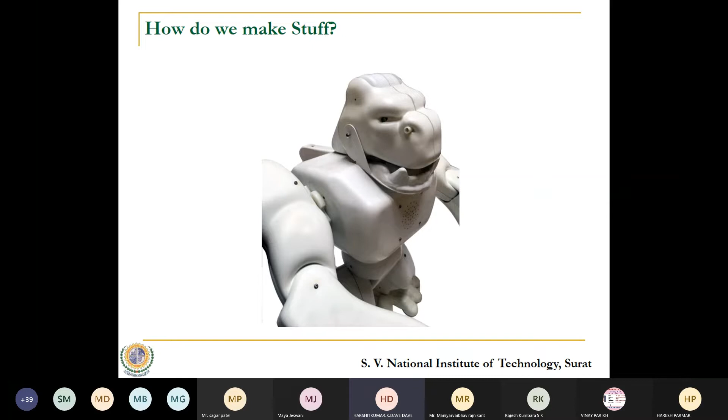Another way of making things is by using forming methods. There are different ways of doing this, but I wish to show this particular example where a vacuum forming process is used to make an interesting toy for kids.

Beyond that, another method widely used is the casting process. In casting, you have a liquid material that is poured into a mold, and a certain shape is obtained when it solidifies.

A very good example is the chocolate that we try to make at home. So that also is an analogy with the casting process.

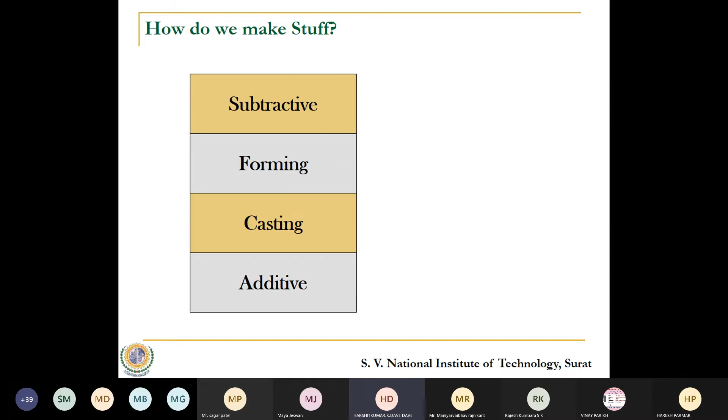But apart from these three, now additive manufacturing or 3D printing, in simple words, is another process which is coming to prominence since the last 10 to 15 years. You would be surprised, and maybe you would know, that it is capable of replacing all these three processes. You can create idols with the help of 3D printing. You can make toys the way we made through forming, and you can also print chocolates. So these things can be applicable to almost all the fields of our engineering applications too.

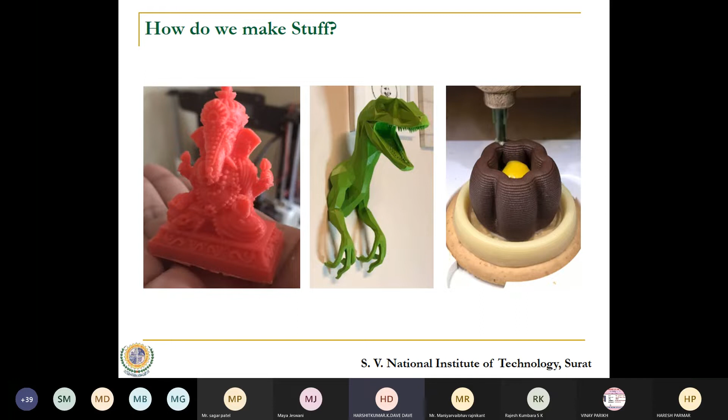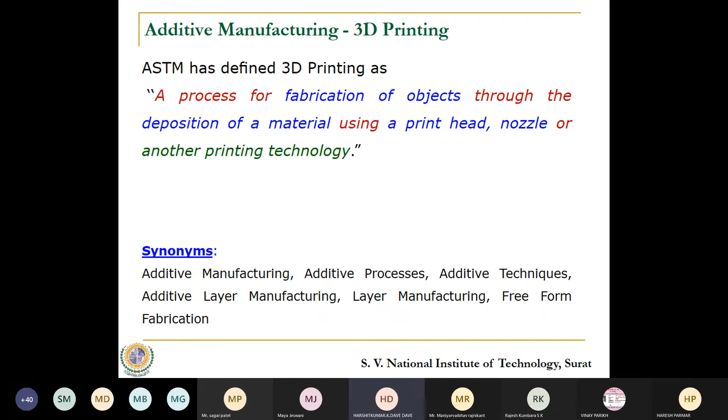3D printing that way is a very recent process as compared to the other processes we have been using. As per ASTM, 3D printing is a process wherein fabrication of objects takes place either through the deposition of some material, wherein you use a print head or a nozzle or any other printing technology. There are 8 specific methods of 3D printing. I'll not go into it right now, but there are 8 ways in which 3D printing can be carried out.

When you compare 3D printing with subtractive processes like machining, what you observe is that if you want to create a square 3D object, your raw material has to have a specific similar shape. For example, if you want to carry out turning to make a shaft, you necessarily need a cylindrical job. Or if you want to cut an object like that 3D object, you need a square raw material. But in case of 3D printing, your raw material can be powder, some resin, or a filament. You have nothing to do with the basic shape of the raw material. The process takes place and you get eventually the type of shape, any shape that you wish to have.

The other important thing is the amount of wastage that you observe, as compared specifically to the subtractive process, is quite less. So these are the 2 benefits. One benefit is related to the raw material, wherein you do not need to have a specific shape of raw material as desired based on the type of object that you want to have. And the other advantage is the wastage is substantially reduced with the help of this process.

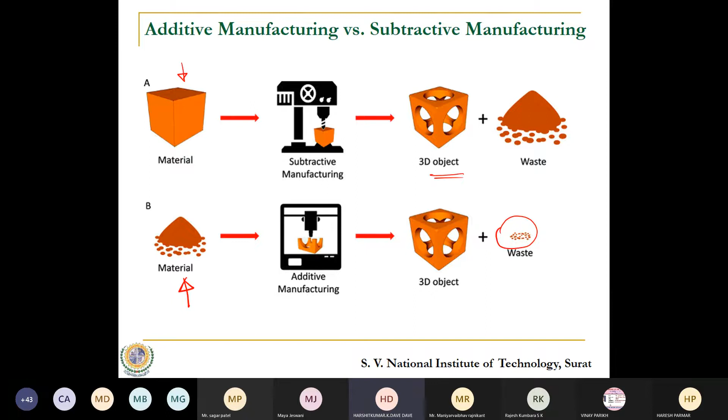Another advantage you see, especially when you compare it with machining processes, is about the complexity of feature that you have. Generally, when you see subtractive manufacturing, or any of the conventional manufacturing processes, as the complexity increases, we observe that the cost will also rise. So if you want to make a simple shaft, it is easier. But if you want to create steps on it, taper on it, curve on it, then you cannot use the conventional machine, you need to go for a CNC machine. Cost of machining increases, labor cost, everything goes on increasing. So as the complexity increases, you increase the cost.

Whereas in case of additive manufacturing, initially the cost is high. If you compare the cost, the initial cost is high. But whatever be the cost, it has nothing to do with complexity. Whatever be the complexity, the cost remains the same, and a break even comes relatively faster. So usually, in the standard design phase, you find that 3D printing provides a good break even with the cost associated with complexity. Now, when you go beyond a certain level, trying to increase the complexity which even regular conventional processes are unable to achieve, in such a scenario, even increasing the complexity becomes free. You don't need to invest anything else for that complexity. So at the same cost, you get better margin and higher profits. That way, 3D printing is approaching and covering the market far more faster than what the conventional processes did in the previous century.

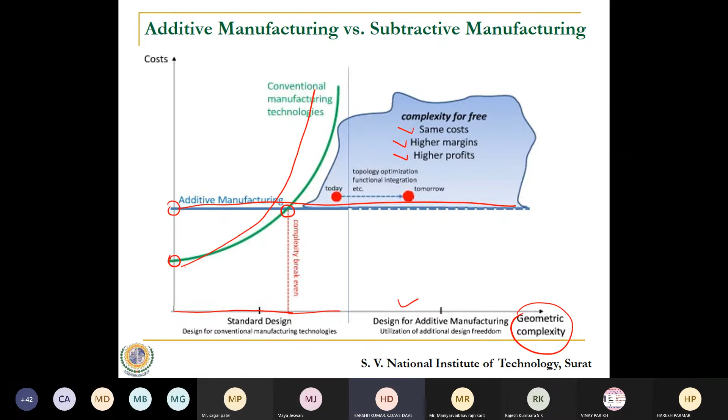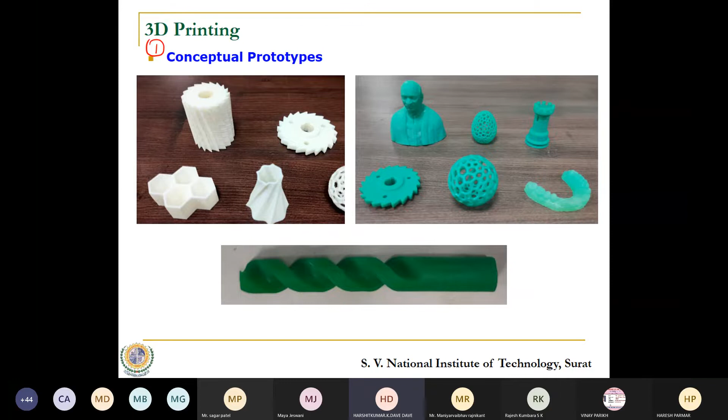Now, where do we use 3D printing? We use it for 4 specific tasks, which I feel. The first one being for conceptual prototypes. So prototyping, very easy. You can see these are the prototypes created by my own students. You can print anything which you can utilize to demonstrate, it is meant for demonstration. It does not give you the functional applications. The other is rapid tooling, where the printed parts act as tools.

Say, for example, you print patterns for casting.

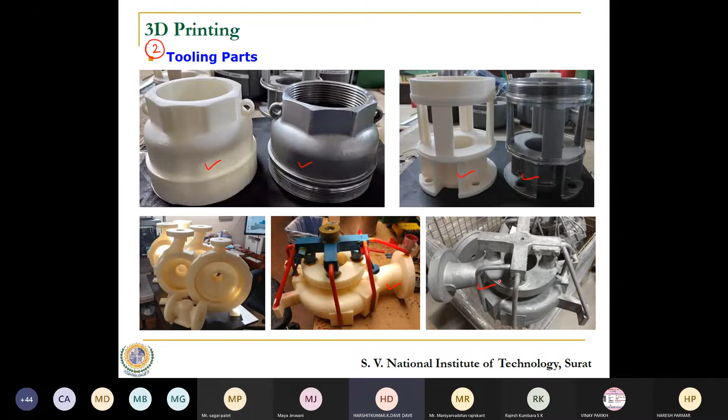So these are different examples of different patterns that have been printed by one of the startups from our institute, and you can see that this is working remarkably well. So instead of creating regular patterns, say for investment casting, you can use patterns made from wax material that can be printed and eventually used. You can see the parts, this being the pattern and this being the part. Here also these are different applications where you are getting good quality products with patterns made by 3D printing.

Another example, which is slowly gearing up, is printing of functional parts, the real parts that you use in the application. So you can see those AC vents for automobile vehicles, or the coverings for different parts. One of the most coveted examples in recent times in the US is a wing of a windmill that is also printed. It is printed in parts.

People have stood there, so you can just visualize the size. But these are the different parts under which it has been printed, and they have been connected very well, and that has reduced the weight, improving the overall efficiency of the process that is being carried out.

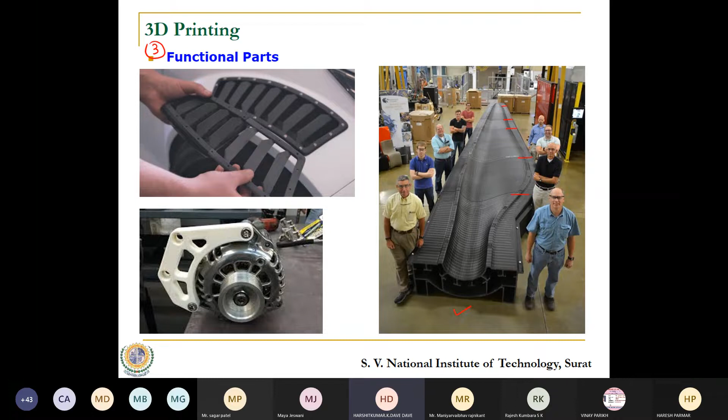And the most important thing is mass customization. Customization was the initial phase, say 500, 400, 300 years back, where a specific part was made as per the requirement. But later on, during the industrial revolution, the first and second revolution, when mass production took lead, it became faster and cheaper, and hence we stopped making custom parts as per the need of an individual.

But if we take customization with the help of 3D printing, it is possible to print customized parts even at lesser cost and faster than mass production. So you can have a shoe made for yourself, an artificial limb printed for yourself. And in case kids grow fast, within a few months their size would change. The same drawing, the same design, you can just scale up depending on the scale of growth, and print a new part.

So mass customization may not only be the requirement for individual use, but also for industrial purpose. If there is a part which breaks, you don't need to buy numerous parts or ask someone to fabricate it. You can have your own printer, and whatever part breaks, you can immediately print and fit it in, as we saw in one of the previous slides. So mass customization, be it at individual level or industrial level, through 3D printing, is taking place.

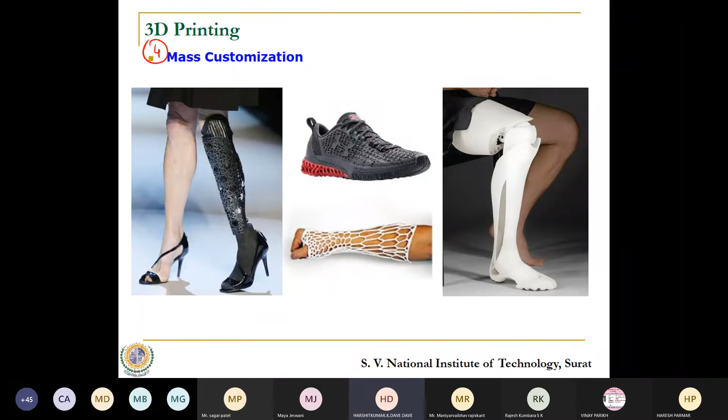3D printing also has a very significant role in the supply chain - the time that is being taken, the expenses that are being incurred. If you see 3D printing, it is somehow helping to reduce the transportation.

In the usual case, what happens is an idea is converted into a prototype, and if it works well, once finalized, you go for production, you assemble the parts. Then after packaging, it goes to the distribution network, then to warehouses, then to dealers, then to retailers, and you go to the retailer and buy it. So the customer gets a part 3 to 6 months after initiation of the process.

So today, if we get a new brand of mobile, probably they started working on it 6 or 12 months back. Even today, the total time elapsed in new product development is drastically reduced. But still, you don't make a mobile at your place, you don't make a toy at your place, you don't make certain medicines at your place. Everything that happens - say the parts required for orthopedic operations - you don't make at your place. They are made at a certain place and transported to you.

But eventually, this supply chain can be drastically reduced if 3D printing is brought into the picture. Whatever idea you have, you can create a prototype, and then immediately go into its production as a functional part. And who can do it?

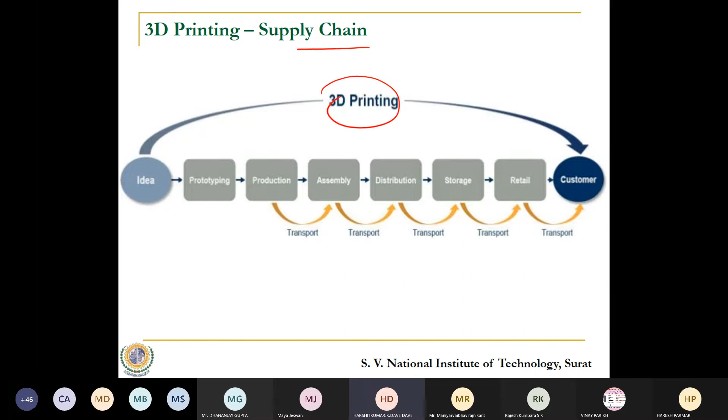This is an example where it works well. This is the International Space Station, which revolves around the Earth 24/7. Amazon does not deliver to them. So if they need something, they have to wait for say 12 months of time when the next space shuttle comes, and they have to wait till then. But for many of their problems, they use a 3D printer, a specific customized 3D printer for them, and they print the parts for them.

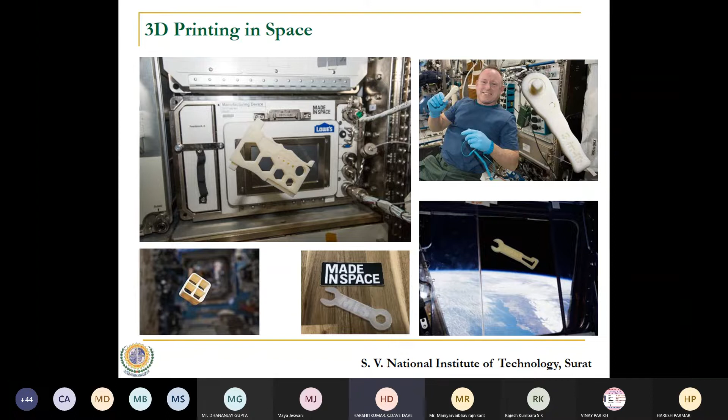Made in Space is a web page on the website of NASA. You can go through it. They have many more such examples. So the customization is happening at your own doorsteps. You don't need the entire supply chain to take care of your requirements.

Over and above this, it works well in disaster management also. 4 or 5 years back, there was a very, very severe earthquake in Nepal. And because it is a hilly terrain, the supply of water was an issue, because you had those roads blocked because of the stones, huge stones falling, rocks falling apart, and the supply of water was also a problem because the pipeline had broken at different places.

But then through UNICEF, around 500 small 3D printers were brought in. About 1,000 people came, and in a group of two, they worked at different local places. As per the requirement, they printed the parts and joined and fixed the problems. And within 2 days, water supply was resumed. India was also involved in that service at that point of time.

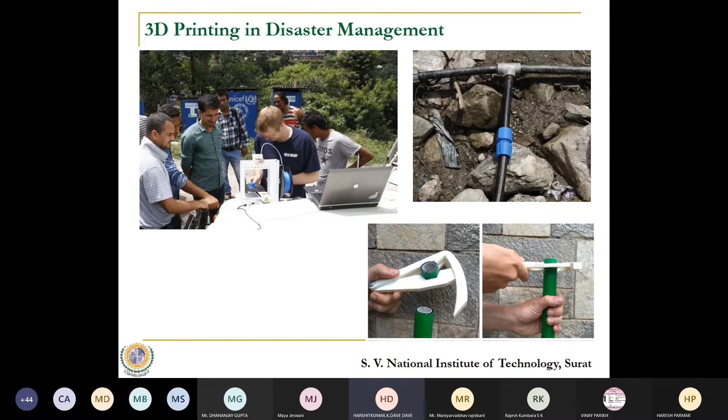So you don't need to bring the entire industry. You can just carry a small machine in a suitcase and bring it into working condition and do your task. So this is how probably it works in such cases also. Over and above this,

3D printing is helping us to connect the virtual life to physical life. Why I am saying this is, you must have noticed that many of us are the college students to the larger extent, and our school going kids to a very larger extent. They are totally dependent on mobiles today. And because of COVID, now everything being, all studies being online, they have mobiles 24 by 7 in their hands. So when there are no classes or even during class, they mute the class, and they may often get carried away by cartoons or maybe by some serials, or maybe students, college students may be into some other recreational activities.

So it becomes very difficult to concentrate on the studies, number one. It is now taking time because it has become a very habitual thing. So kids, even I see at my place, at my home, my own son, he often gets busy with some sort of cartoons or serials, and he does not want to go out for play. So the thing is, our social life, our circles are getting reduced because of this, and that is bound to happen. We cannot avoid it or eliminate it. We can try to control it.

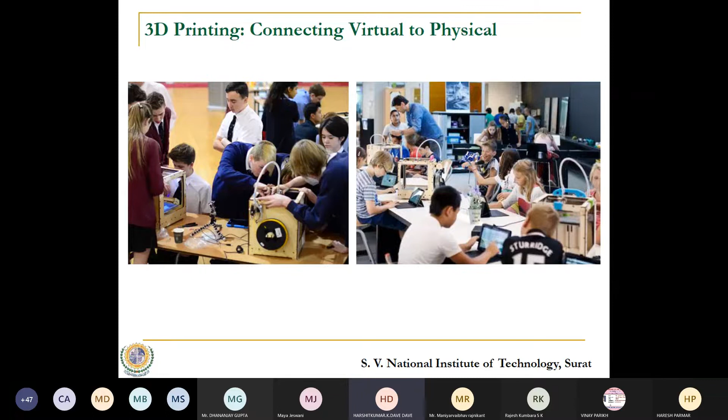The same connection between virtual and physical happens in Industry 4.0. How does that happen? When we are doing it at a local level using 3D printing for our kids, the same thing happens at a global level, wherein physical systems are getting connected virtually. So it's not that different parts of a factory are getting connected - different factories at different locations are also getting connected.

So what you need is the requirement of some sort of automation in your activity. You need good robotic based motion control, you need the intelligent source of data transfer, and all of them connected through some sort of servers, wherein in real time you can pass on the information.

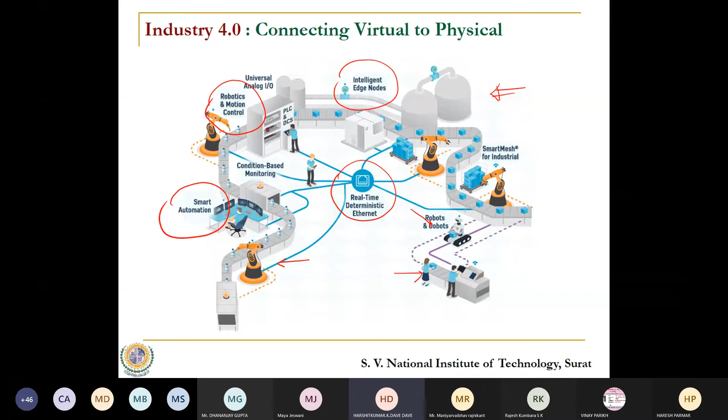I'm sure this must have been discussed by many of the speakers before me in the last 3 days. But still, I feel this would be good - I would try to establish this connectivity with 3D printing in some other way.

Now, when we see different industrial revolutions, the first revolution that you had was about 200 years back, and since then we have seen 3 successive industrial revolutions. People say that right now is the era of Industry 4.0, but I believe that Industry 3.0 is still going on, and it is evolving into Industry 4.0.

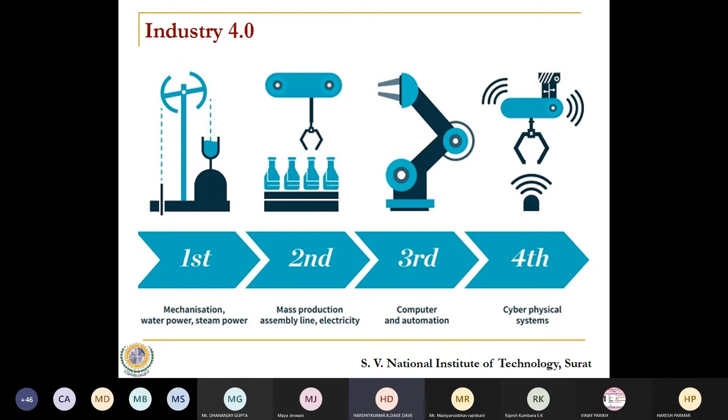So the current age, this decade, or maybe the coming decade, may not be fully Industry 4.0, but it would be some sort of combination of 3.0 and 4.0.

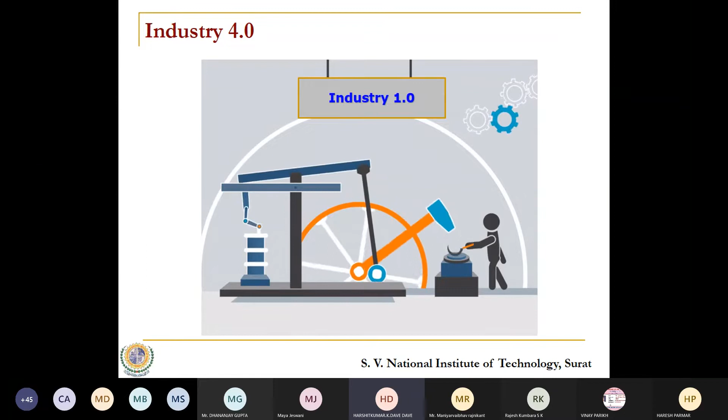If we see through the historical background, the first industrial revolution started in Europe sometime in the 18th century, where large-scale automation of the process was carried out. So instead of you being involved in each and every phase of the production of a part, you used mechanical power instead of human power to carry out the task. It led to better efficiency and faster outputs.

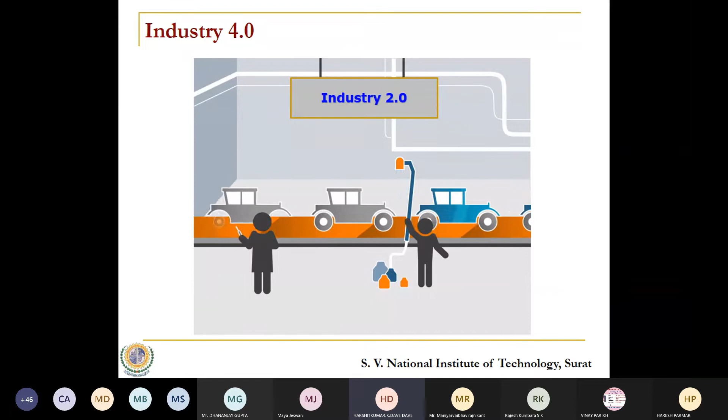So we reached a stage where mass production was taking place, and interchangeability became a rule. Rather than going for customization of a part, you produce interchangeable parts on a very large scale. That led to faster production, larger quantity of production, and it helped in a way during the Great Depression that came after the First World War. This mass production helped to reduce the cost and take care of the pocket of the people as well as the profit of the manufacturers. That's why this became a buzzword, Industry 2.0.

In Industry 3.0, now we are reducing the involvement of men. Instead of that, you have computers and you have automated the system.

So the machines work by themselves, they are controlled through computers. But to operate this computer and to set up the machines, you still need the involvement of humans.

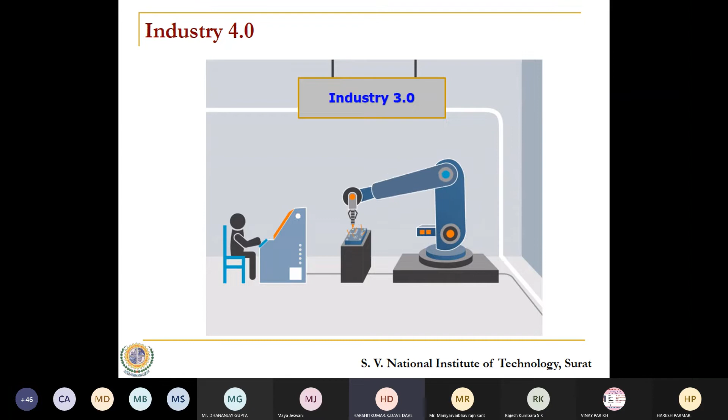So automation has gone far and wide, starting from the first IBM computer that might have been the size of a regular office, it has drastically reduced to laptop size, and its capability increased, and so automation has also increased. But in this case also, human intervention is constantly required.

But when you go through Industry 4.0, more or less the systems remain the same. Physical systems, it's not that you throw away your machines, you throw away your factories. But what you do is you automate them with the help of self-learning systems.

So what you have is a huge capability of computer systems where there are many algorithms which can take decisions based on either the previous experience, the data set, or the rules that you have given. So it takes its own decisions, and you are only required to feed or connect them together.

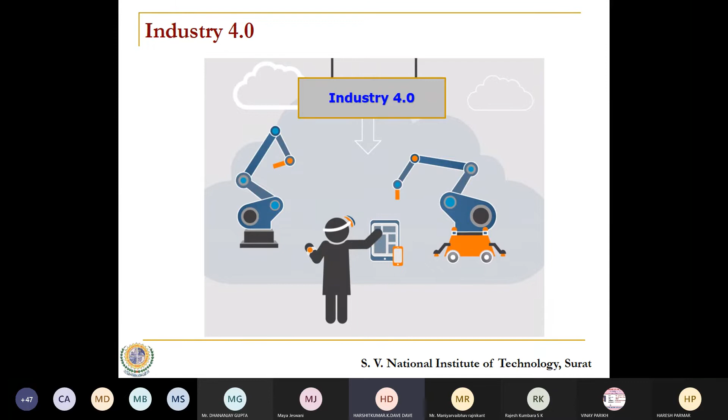So that way, Industry 3 and Industry 4, we are somewhere in between. As far as India is concerned, 4.0 is slowly taking up, but still, far and wide industries are still in Industry 3.0 mode.

So what is Industry 4.0? I hope this must already have been discussed. So here you have three technological trends which are helping to transform Industry 3.0 into Industry 4.0, and these are connectivity, intelligence, and flexible automation.

So what you do is the automation that you had, you are trying to make it more flexible, so something which can be done on one machine can be done on many machines at a time, or maybe in parallel simultaneously, and you connect those systems together. Not only do you connect them, you use a program, an algorithm in its operation, which is intelligent enough to take decisions.

So just as we have simple decisions of 0 and 1, on and off through PLC systems, now you have algorithms which utilize the previous decisions, all previous decisions, or the data sets that are fed to it, and it tries to judge the situation the way a human judges, and it takes the decisions.

Say for example, setting of parameters, setting of speed, taking care of temperature, taking care of pressure, transmitting information, transmitting the product so that in the handling system, they do not collide with each other, and they do not have unnecessary waiting time.

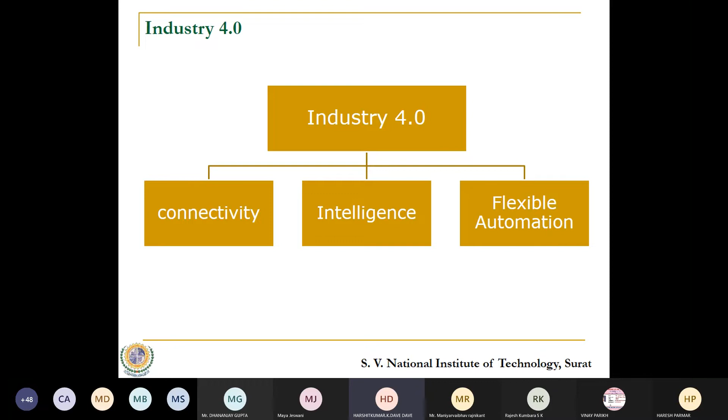So those scheduling and peripheral activities related to production, they are also very well taken care of with the help of such a system.

So in a way, what you do is you converge two separate entities today: information technology, a very strong entity, as well as operational technologies, manufacturing technology, operational management. These are also very evident and strong technologies in Industry 3.0, but these two are separate entities as a whole.

And what you try to do is converge both of them together, bring both of them together, merge certain aspects of both of them together, and create a system which is a cyber physical environment, a cyber physical system, a cyber physical setup. And that setup is Industry 4.0.

So this convergence which you see between IT and operational technology becomes possible because various digital solutions have come up, various advanced technologies have emerged, and those technologies, those combinations, they are working simultaneously, hand in hand together.

So this leads to certain technological pillars of Industry 4.0. If you can see, there are different aspects, different technological pillars which are based on advanced technologies and certain digital solutions, chief among them being Internet of Things, big data as well as its analysis, and cloud computing.

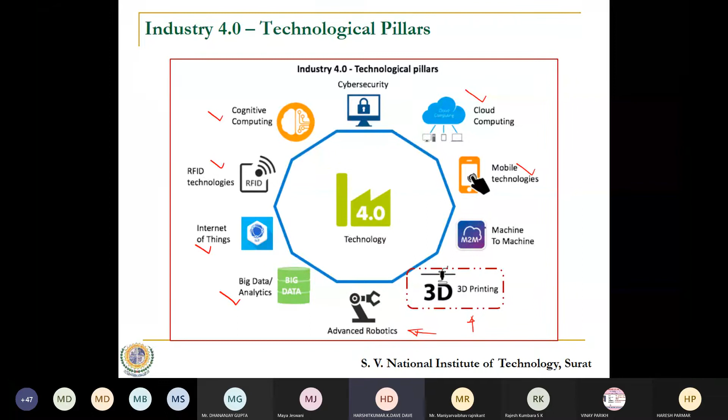Now, how do they become part of Industry 4.0, or why are they part of Industry 4.0? If you can see, there are three basic things which are helping the digital transformation of manufacturing, wherein what you do is you integrate the separate systems and processes initially, and you try to integrate them through different computer systems across the entire setup.

So there you use Internet of Things, there you use cloud computing, and there you use big data. Now these three are the heart of digital transformation.

When a digital transformation takes place successfully, if industries are using it, they become digital with their existing physical systems and products, and the interfaces that come up become faster and more productive. So the system can work hand in hand with the suppliers as well as with the customers for real-time change. Now, how does that work?

The first and foremost thing is the Internet of Things.

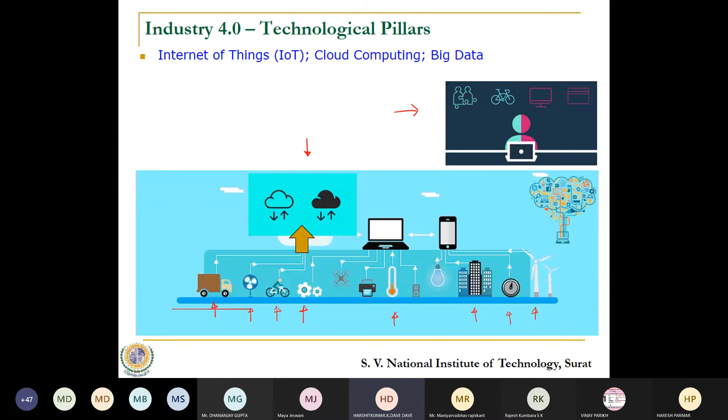So how to save your data? Say I have my internet banking facility, I have my internet credit card facility, I have an Aadhaar card number that is connected with many things. Now that data has to be saved, that data has to be protected. So such cloud computing and big data analytics through Internet of Things requires cyber security also. So a new pillar is generated that way. However, we would not focus more on the cyber security part, because for the 3D printing part, we need to understand these three basic pillars: the Internet of Things, cloud computing, and big data.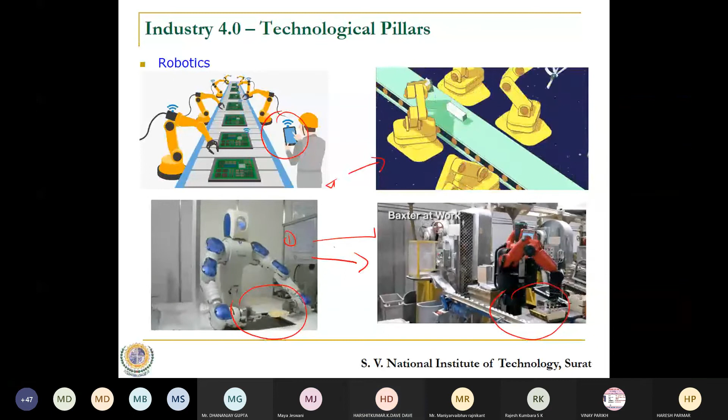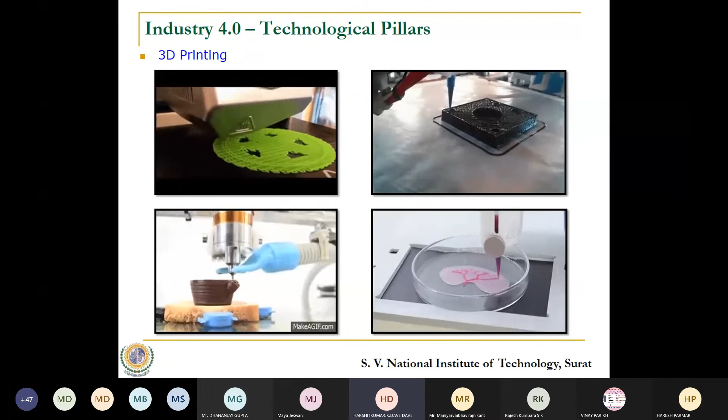And the most important aspect which we wish to discuss is 3D printing as a pillar in Industry 4.0. There are different fields where you see 3D printing taking its own role and creating its own space, be it electronics, be it functional parts, be it food industry, be it biomedical applications, be it space, aerospace, be it defense, anything you can think of - 3D printing is taking this by storm. What must be the reason that as a technological pillar, 3D printing is involved in Industry 4.0, and we do not involve the other conventional manufacturing processes like machining, or forming, or casting? There are certain reasons behind that.

We know that 3D printing is able to produce parts in such a way that a new system is evolving, wherein it is possible to go for an intelligent product system. You can converge automatic and autonomous machines together and try to make them intelligent systems who are able to exchange information from the software or from the servers and respond quickly, so that the entire management of the production activity can be very well taken care of. This is faster and prompt than the other manufacturing systems as on date.

3D printing, in a way, is capable of turning our usual 3D drawings, 3D design into a product without any major intervention. So if you want to convert a 3D drawing into a part using, say, Mastercam to devise a system, then you will have to work on that software and generate a G-code program. That program has to be fed to the machine, and accordingly milling or turning process would be carried out.

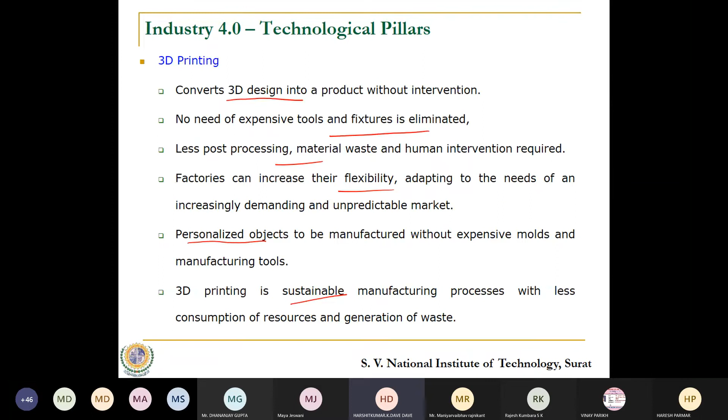Considering this utilization of 3D drawing into a product—no tools required, no post-processing or human intervention, better flexibility, customized and personalized objects, and sustainability—these are different things enabling 3D printing to become part of the factories of the future. And when we coin the word 'factories of future,' these factories are becoming factories of the present day. This is happening very fast in Western countries. It may take some time in India, but 3D printing has taken the manufacturing sector in India to a huge extent, and people have started moving towards it. They don't totally remove existing setups—Industry 3.0 is not fully removed, but they are trying to integrate Industry 3.0 with Industry 4.0 by using 3D printing as a manufacturing tool and adding digital platforms to the best of their capabilities.

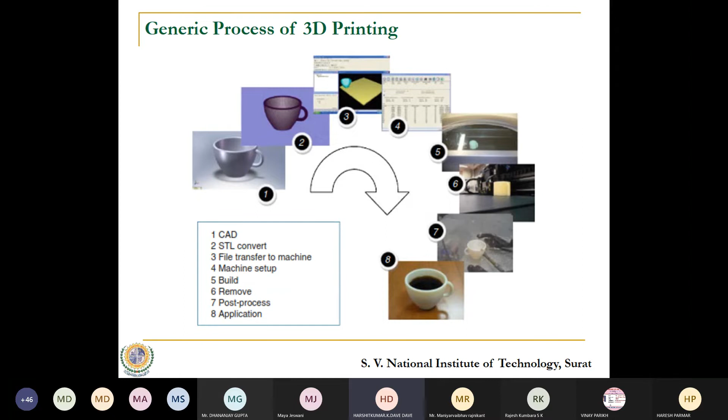When you see this generic process of 3D printing, this is well known—nowhere do you see a need for a physical entity, physical tool, physical mold, or physical parts, and no human intervention is required. I'll take this with a simple example: you have a certain 3D source.

You either have already designed a part with some 3D software, or you have images of objects, say 4, 5, 7, 10, 15 photographs from different angles, and using software you combine them and create a 3D drawing, a CAD drawing. Or you have a physical entity, say for example my own self. You scan the 3D part, the human or the product, and that scanning data is suitably converted into CAD.

So CAD is what you need initially, and everything that you do to generate CAD is digital. You need software, you use software, you store data, you store cloud data, you store point data, everything is stored, and that becomes a CAD drawing.

This CAD drawing is converted into a tessellation that is carried out, and an STL conversion takes place. So what you do is you divide this entire drawing into layers.

So now layers become 2D drawings, and for those 2D drawings, you can very easily create a G program. So programming is carried out. This part geometry, this CAD geometry is converted into STL, and each layer in this STL is converted into a program. And with the help of this program, you try to convert it into a part geometry.

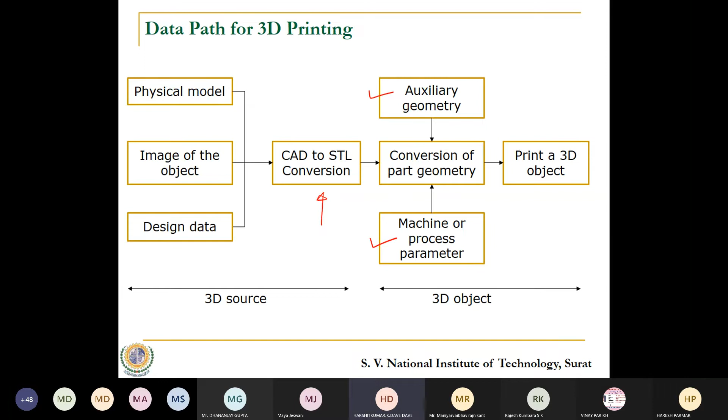So either you need to ask someone, a carpenter, to make a similar type of piece and fit it over there. But in case if you have a 3D printer with you, you can just measure the requirements, fix up the dimensions, and print anything so that it would fit at the right position. So this is how this becomes a very successful process in the time to come.

This is the same example which I want to show how data path is transferred. At our place, we have a statue of Sardar Vallabhbhai Patel at our institute main gate, and that can be scanned and converted into 3D CAD data, and that 3D CAD data is converted into an STL file.

Certain auxiliary parameters are fixed for support structure, machine parameters are fixed, and real 3D printing takes place. You can see these are support structures, so these are auxiliary drawings. Those support structures are removed, and you do certain finishing and coloring of the parts, so certain post-processing activities are carried out. All of these things are digitally done.

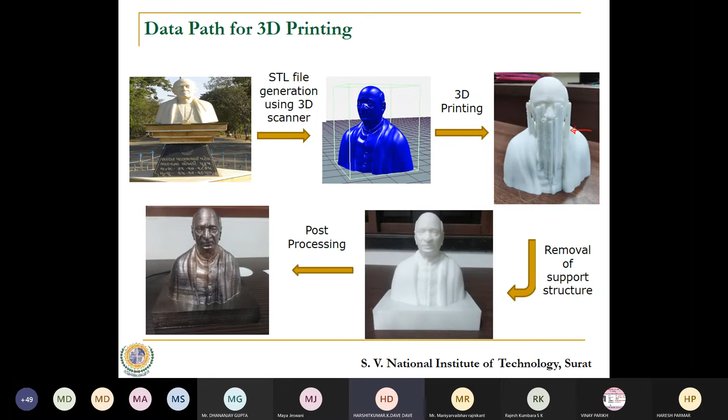To some extent, you need human intervention in post-processing, but till the part that is printed, you don't need any human intervention.

As a part of 3D printing, as a part of Industry 4.0, there are many things which are required. So even though you can control it from a remote place, whatever be the remote place, you will have to sit on a computer, you will have to work on a computer. So what things are required?

You need to work on the CAD model, number one. So there is a scope of working on design software, and there is a scope of converting the CAD, converting the 2D images or a physical part, scanned photographs, into CAD. So you have a scope of working on design software and translating software.

When you want to make this part, you will have to build it, work on the process and the part dimensions. But once this CAD drawing is ready and your building requirements are fixed, you need to go for the processing part. You will have to verify the CAD file, convert it into a suitable STL file, then into a suitable program similar to our usual G code programs. You will need to define the orientation of the part and the parameters of the process. So all those things you can work on.

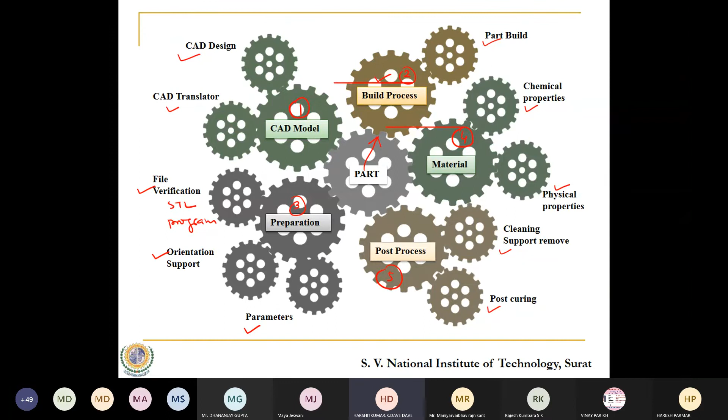So these are different aspects to make a part. As a manufacturing engineer, you can work on any of these aspects for any process, for any combination of raw materials, so that 3D printing as a pillar of Industry 4.0 becomes stronger than what it is today.

What are the various advantages which can be achieved if 3D printing is part of Industry 4.0? As we discussed, we are free from the complexity of design, and we are free to tailor the microstructure. Generally, temperature has its own effect on a part that is machined or bent, so you need to go for heat treatment. Whereas in this case, you can very well define the type of microstructure you want and produce it. If you wish to make it less dense, you can increase the porosity.

If you want to make it porous, you can reduce the density. If you want a solid part, you can make 100% density. Apart from that, you can change the design, the structure, say at 50% density, internal shapes, internal design - that also can be worked upon, so you can tailor anything you want. You are also free from scale. If you make a part in the size of 1 by 1 centimeter, you can also make a part that is 1 by 1 meter. The same design, the same drawing, the same STL file can be scaled up into different dimensions. Of course, the capability of the machine plays certain restrictions into scaling, but yes, it is possible to scale up. You are free from batch sizes.

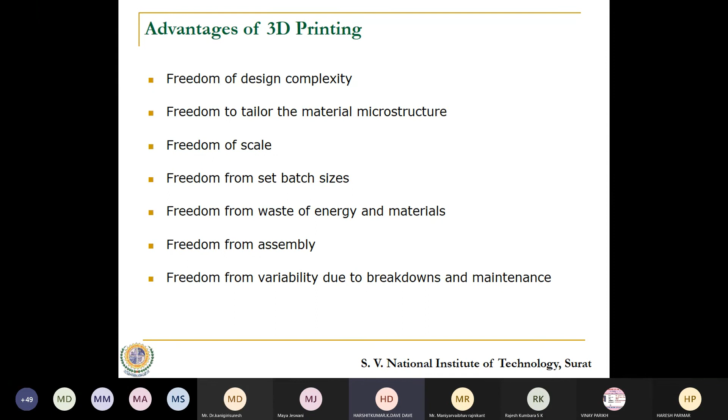And you are free from variability that comes because of breakdowns and maintenance. Suppose on a CNC machine, if I am less efficient than somebody else, and during my batch the machine works well, but when the next batch comes with an efficient operator, the machine fails, so that time is wasted and he is not able to produce. What I produce and what the other person produces, the quality is different and there is scope for variability. Whereas if you are printing, you don't do anything, the entire thing is done by the machine. So there is very little chance of finding variability in the parts printed during breakdowns, shift changes, or maintenance periods. So those things are largely eliminated.

But then what are the challenges which 3D printing faces to become an integral part of Industry 4.0? The most important challenge is the high cost of the machines.

Not only machines, but the materials. Apart from FDM and to some extent SLA machines, all the other processes and machines, be it SLM, SLS, polyjet, whatever the type of system, for polymer material or metallic material, these machines are very costly. Your initial setup cost and operation cost are very high. With advancement, maybe with more competition, these prices would reduce.

But as on date, high cost is a very big challenge. There is a need for more rapid 3D printing throughput. The technology has to be enabled in such a way that operating speed is increased, resolution and accuracy are improved. There is a requirement of building larger volumes. Most machines have a size of say 250 by 250 by 250 mm. There are few machines which may be say 500 by 500, but then the cost would be 3 times what you have. So just by increasing the size up to half a meter, the cost drastically increases. So there is a huge requirement of transformation of the technology and the cost associated with it. If that is done, probably this can faster replace the conventional processes.

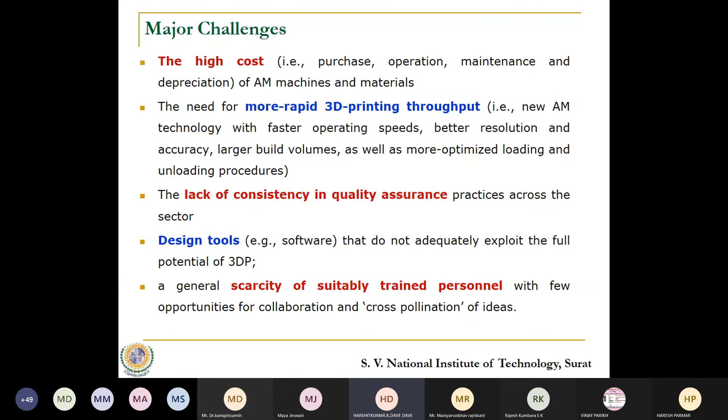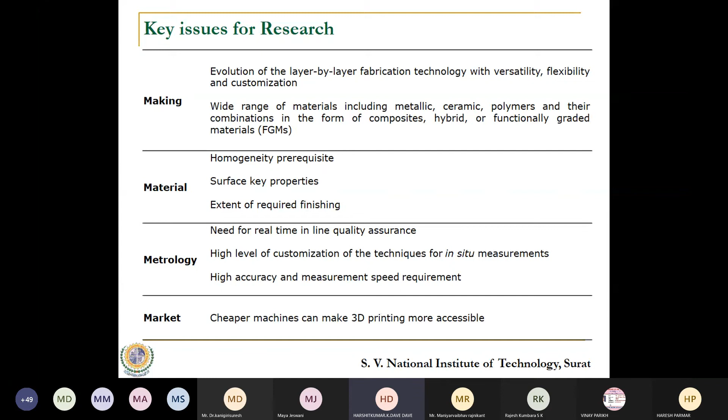So these are different challenges which all, including us, have to work on. These are certain key issues related to that. So more or less, this is the revision of what I discussed. I would like to conclude with these certain remarks.

Most manufacturing industries will benefit if they adopt 3D printing technology. How would they benefit? Because it would result in significant cost saving by properly digitizing their process and inventory, as the speed, reliability, safety, and quality of 3D printers will improve, which is going on, and it is expected that within the next 5 years we will have half the price of what it is today. Then 3D printing would be set to play a very major role in the digital transformation of industry.

Now, as this 3D printing technology evolves and develops, a range of new products can also be manufactured. More complex designs can be taken care of, more complex functional parts can be made. So those things will definitely come up.

So now when you are to design new parts, you need more design engineers, you need more data enablers, you need more people to work on those data sets. So things would result in a spiraling rise in the requirement of trained manpower.

Now, the rate of development of specialized printing materials and integration of digital security to protect intellectual property, and the certification of the parts that you make - even on the smallest gold jewelry today, you have a hallmark, but on a 3D printed part, we do not have any certification yet. On a part that you have, you will see an ISI mark or BIS mark or certain Agmark marks, depending on whatever product it is. But 3D printed products do not have any certification.

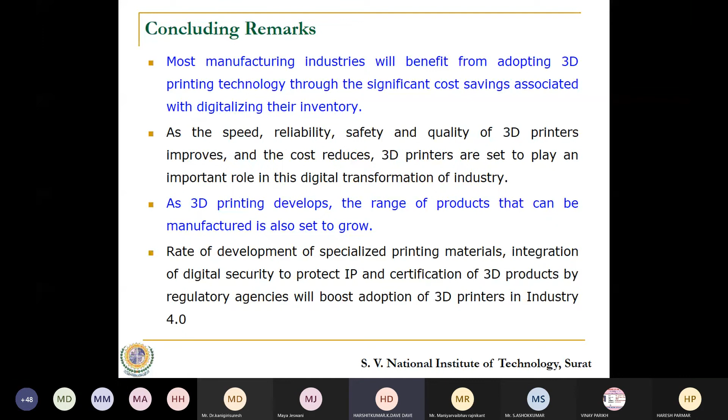Thank you very much, sir. Thank you so much. The area and the challenges, the advantages, the application of 3D printing that is covered by you and presented in such a manner that, by knowing it, it is the only process by which you can reduce time to market by reducing the modeling time and other such critical things. Even though there are some IoT devices available for mounting on other manufacturing processes, considering the advantages of this 3D printing, we can see the future that, as you say, if one person is here and comes with a demand that I want a copy of this component, it will be possible. So 3D printing is a key component of the revolutions taking place in industries. Thank you very much, sir, for giving such wonderful information.

It's my pleasure. Sir, it is our pleasure also to have you with us, in spite of you having some throat infection, but you presented in such a beautiful manner that nothing was missed. Now I request Dr. Chirag Maradia, sir.